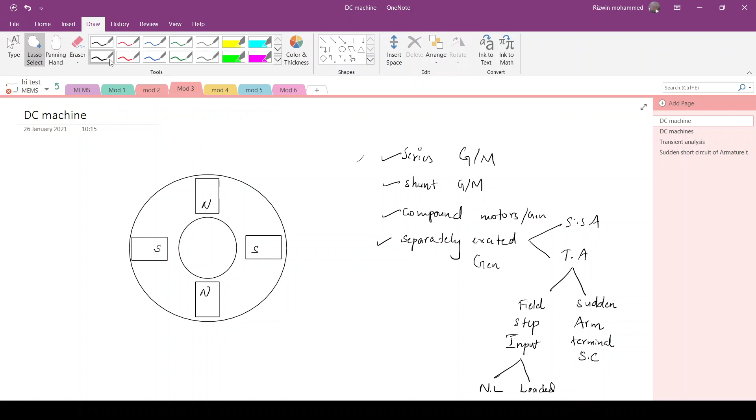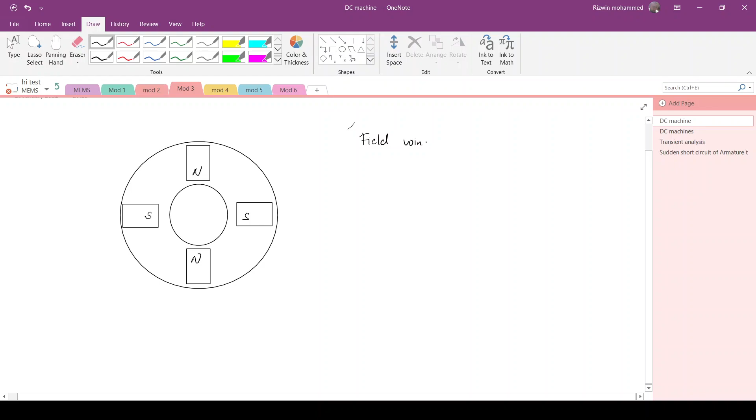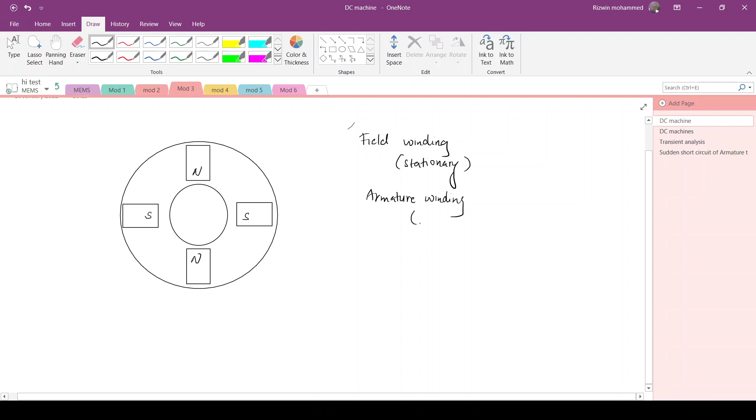So let's start. As you know, DC machine അകത്ത് you will be exciting both the field winding as well as armature winding. Field winding is made stationary. Field stationary ആണ്. And armature winding is rotating. Armature winding will be made as rotor. Rotor circuitൽ നമ്മൾ രണ്ട് എക്സൈറ്റേഷനും കൊടുക്കുന്നത് DC ആണ് for DC machine. Okay, so you have split rings, commutation circuits. ഉള്ളിൽ ജനറേറ്റ് ചെയ്യുന്ന AC-യെ DC ആക്കി മാറ്റാൻ you use commutator. Okay, so commutator ring ഒക്കെ ഉണ്ടാവും ഈ സർക്യൂട്ടിൽ. So the generated voltage inside the armature will be AC, and using these split rings you will convert it to DC. അതാണ് അതിന്റെ ഒരു ബേസിക്സ് എന്ന് പറയാനുള്ളത്.

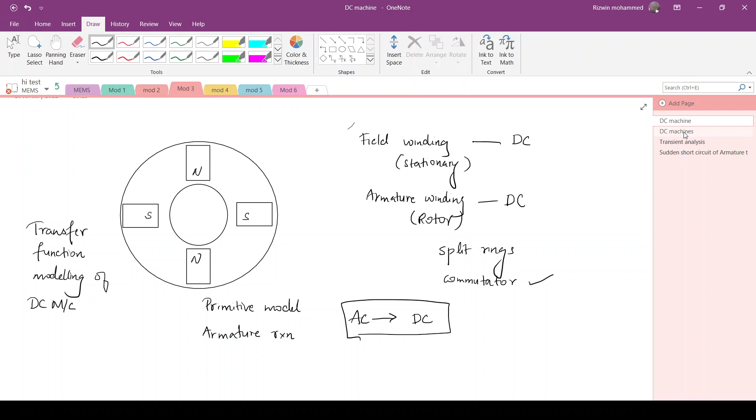So DC machine primitive model, you can see the field winding is represented by DS coil, and the QR coil is the armature. So it is rotating at the speed of omega r, and the current flowing will be IQR through the armature coil, and VQR will be the voltage across the armature terminals. And field winding, നമ്മൾ ഇതെല്ലാം DC മെഷീനിലോട്ട് കൺവേർട്ട് ചെയ്യുമ്പോൾ the armature current will be IA and armature voltage will be VA. So because it's a generator, now we are studying generator, so direction of current will be opposite. So the minus IA ആണ് വരിക. So നമ്മൾ equation derive ചെയ്യുമ്പോൾ we will substitute IA as minus IA.

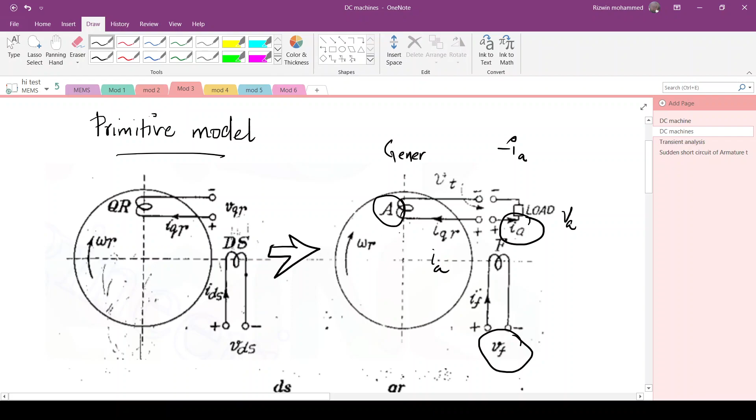Okay. And VF is the voltage, and the field current IF will be flowing through field winding, and the armature is rotating at the speed of omega r. Okay. നമ്മൾ ആർമേച്ചർ കോയിലിനെ A എന്നുള്ള റെപ്രസെന്റേഷനും ഫീൽഡ് കോയിലിനെ F എന്നുള്ള റെപ്രസെന്റേഷനും യൂസ് ചെയ്യും. So let's go to the equation. So this is the standard equation for two coils, VDS and VQR. നമ്മളെ വോൾട്ടേജ് ഇക്വേഷൻ ക്രോൺസ് പ്രിമിറ്റീവ് മോഡലിൽ നിന്ന് ആർമേച്ചറിന്റെ QR coil as well as DS coil ഇതിന്റെയും വോൾട്ടേജ് മാത്രം എടുക്കുകയാണ്.

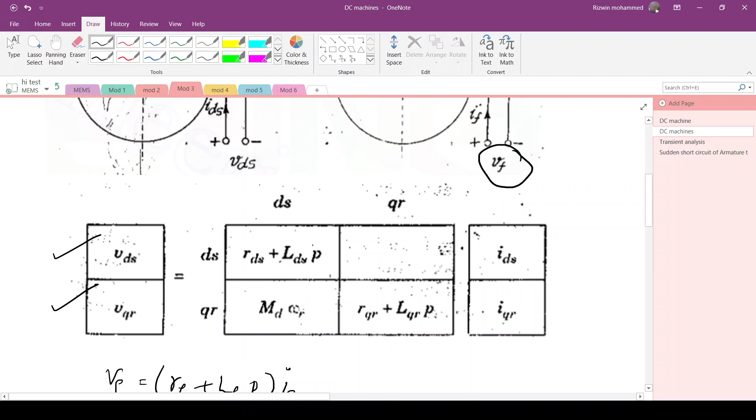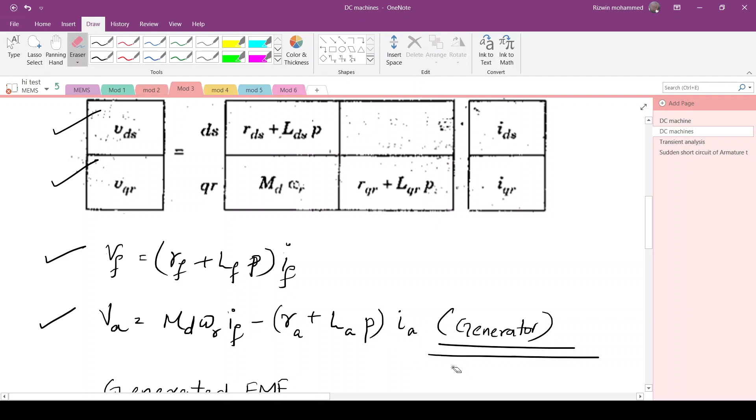Okay, so when we convert into DC machine model, VF as well as VA. VA എന്ന് പറഞ്ഞാൽ armature terminal voltage. Also you can write it as VT. Okay, so VF is equal to (RF plus LF p) IF, where RF is the resistance of field winding, LF is the self-inductance of field winding, and IF is the field current. And MD omega r IF is the induced EMF E. Minus will be considered for armature current when it is flowing in the negative direction. So minus IA into (RA plus LA p). So because it is generator, we are giving a negative sign for IA. This will be the difference. So let's look more into generated EMF. So the basic equation for generated EMF EA in case of a generator is, നിങ്ങൾക്ക് familiar ആയിട്ടുള്ള equation ആണ് φPZN by A.

Okay, so phi is the flux per pole, P is the number of poles, Z is the number of conductors, N is the speed in RPS, rotation per second, and A is the number of parallel paths. Okay, here N can be represented in mechanical speed as omega m, so this is the angular velocity, omega m is equal to 2 pi n.

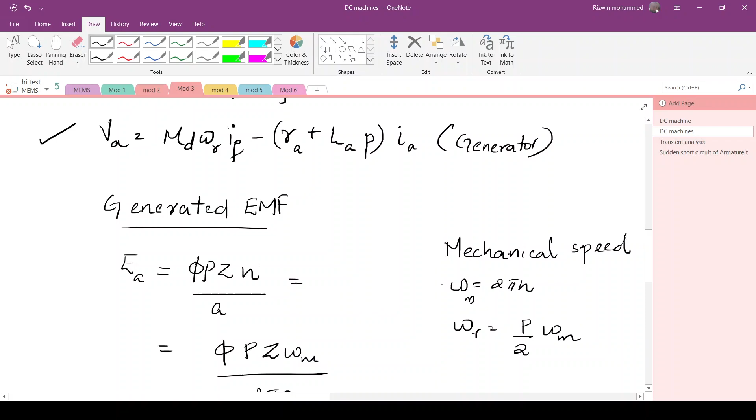So when we convert into electrical radian per second, the omega m is multiplied with P by 2. So you will get omega r, which has a unit of radian per second, which is the angular velocity itself in electrical domain. Okay. Thereafter, n is replaced by omega m. So n is equal to omega m by 2 pi.

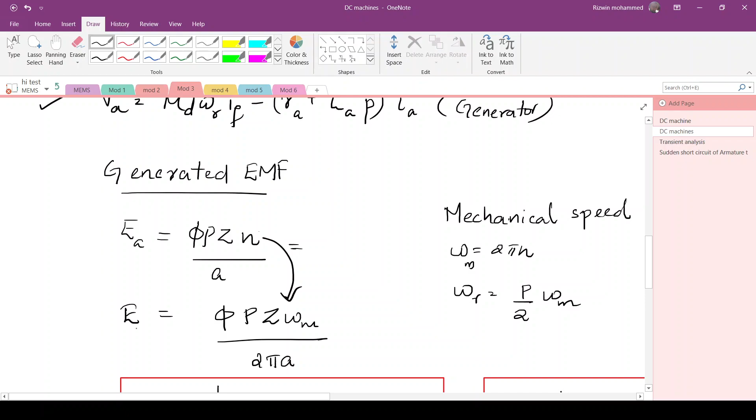That is substituting. So you will get the induced EMF equation E as phi P Z omega m by 2 pi A, like this. This omega m and P we will take together and replace with omega r. So that will give you the final equation for induced EMF. This is the relation. So you're substituting that and you will get E is equal to phi Z omega r by pi A. So this will be from the voltage equation.

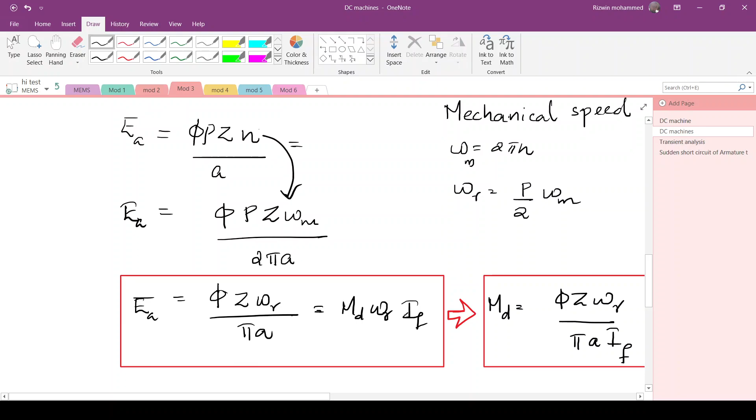The induced EMF will be MD omega r IF. Then for the mutual inductance, we will get MD is equal to phi Z omega r by pi A IF. So this is the equation we have derived for the D-axis mutual inductance of the DC machine.

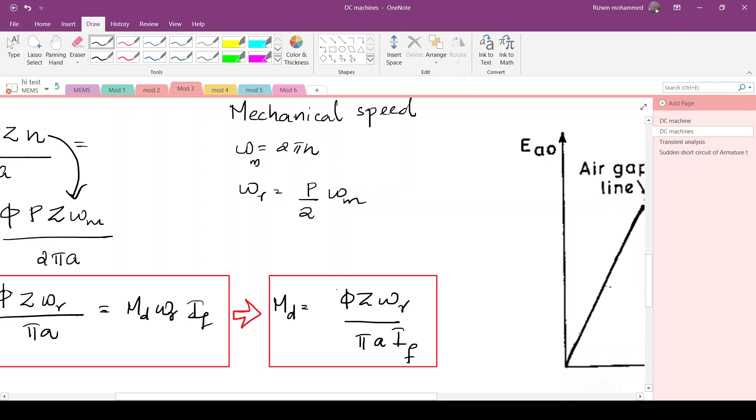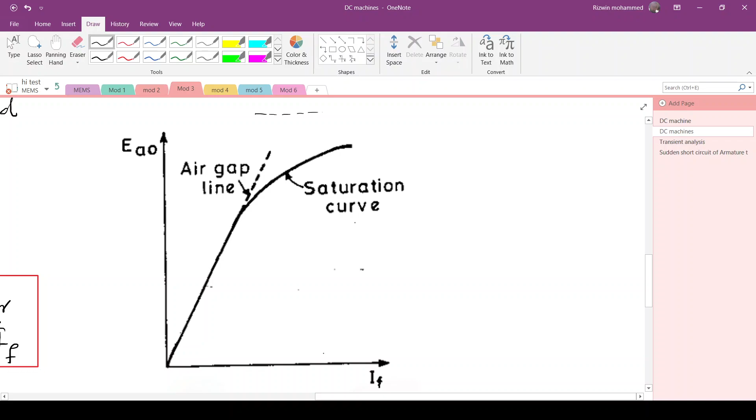So this is the open circuit characteristics. You will be familiar with this characteristic curve. Okay. So this is the graph between field current and generated EMF. So you can see the air gap line which will be tangent to the initial portion. That is what we call the air gap line. The saturation curve is like this.

So we can explain this using this equation, MD equals phi Z omega r by pi A IF. So from the equation we can see MD is proportional to phi by IF. So when you increase field current, the mutual flux will be increasing. Phi m is the mutual flux per pole. So phi m also increases with IF up to this point. Thereafter, when you increase field current, phi m gets saturated. So phi m will become constant, and if you go on increasing field current, as you could see from the x-axis, the mutual inductance reduces.

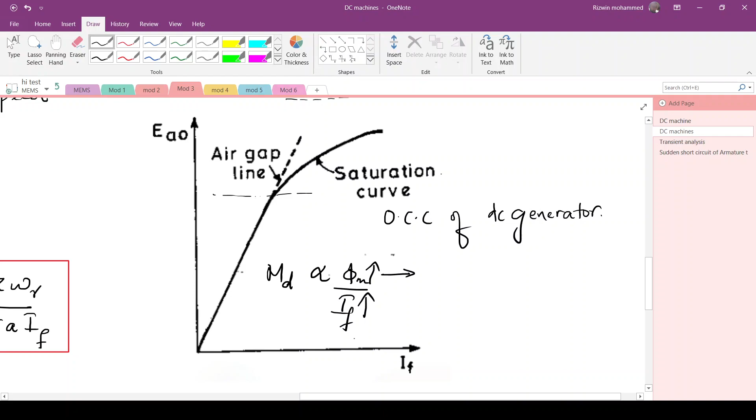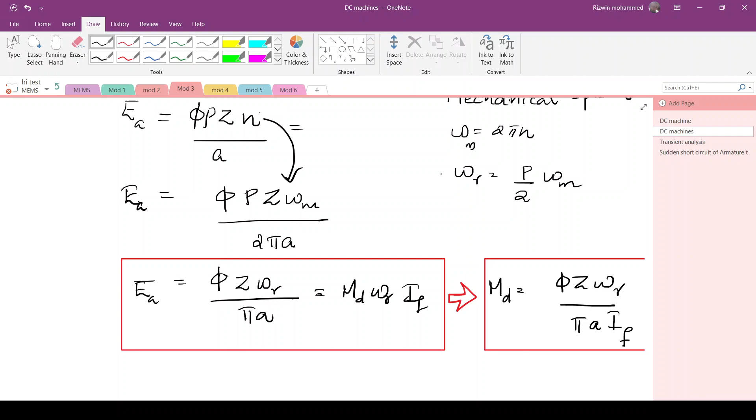So let's move on to steady state analysis. In steady state analysis, we will substitute P is equal to 0 because it's a DC machine. In steady state condition, there is no d by dt term, so it is equated to 0. So we will get Vf is equal to Rf into If. Vf and If will be in capital letters; steady state is shown by using capital letters.

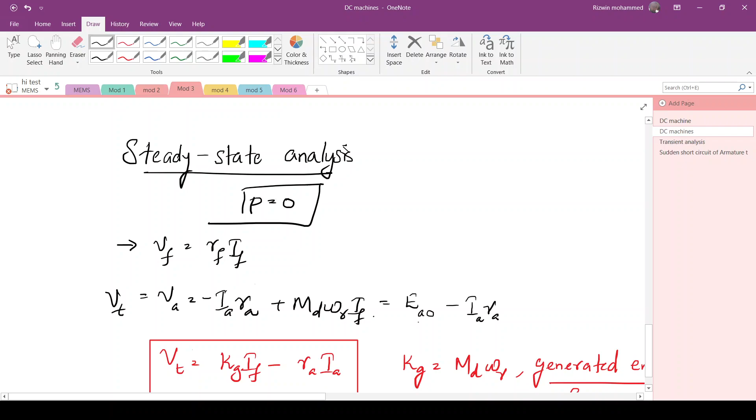Similarly, VA or VT, the armature terminal voltage, will be minus IA RA plus, there will be no P LA component, so that is equated to 0, plus MD omega R IF. So this will be written as EA0 minus IA RA. This is the terminal voltage we get. So EA0 can be written as MD omega R IF.

So MD omega R can be substituted as a constant kg into IF because the other two are constant in the linear portion. Until saturation, MD omega R will be constant, so it is kg. Okay, so writing kg, the terminal voltage can be obtained as VT is equal to kg IF minus RA IA. So this is all about the first topic in DC machine.